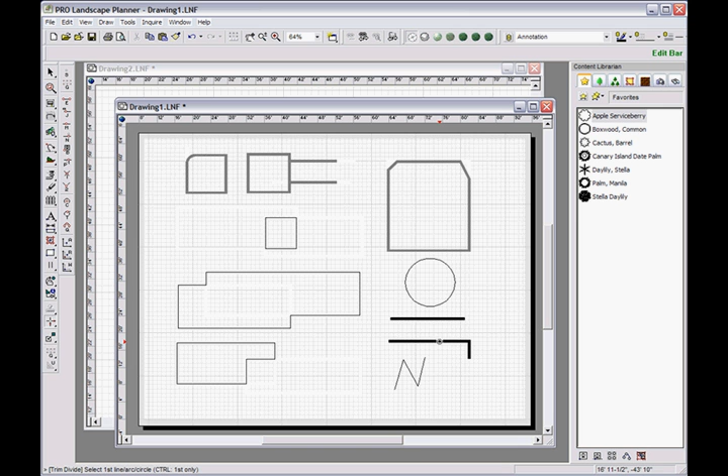Alright, so now the next tool on the trim menu is the trim divide. What this is going to do is take a polyline and break it up into two segments. Let me go ahead and click on the first segment and then the second segment. As you can see now, it is two independent lines, which I can move apart like so.

Okay, so the next item on the trim menu is the trim subdivide. Trim subdivide works with both lines and ellipses and circles, so I can break this up into several segments if I'd like to. What I need to do is set how many segments I want up in the edit bar. Let's go ahead and select 6 segments, and we'll press enter to accept the value. And we'll come down to the circle and we'll just click on the circle here like so.

Let me go ahead and click on this line and subdivide it into 6 separate sections like so. Now that may not be apparent at first, but if you go and you click on the circle here, you'll see that it is in 6 equal segments. And if I press the delete key on my keyboard, I can delete those segments out.

Okay, now let me go ahead and double click on this line here, and you'll see that it is in 6 equal segments. If I wanted to delete one of those segments, I could click on the line there in between the vertice points, and then I can select delete on the keyboard to delete that segment out, like so.

Okay, the next trim tool is the trim join tool. Now you'll notice down here I have some line segments that do meet up, but as I select them individually. If I go over to the trim menu and I select trim join, and then I click on the first line there, and then the second, and then the third, and then I go back to the second to join those two together, you'll notice when I select those, they're now selected as a single polyline.

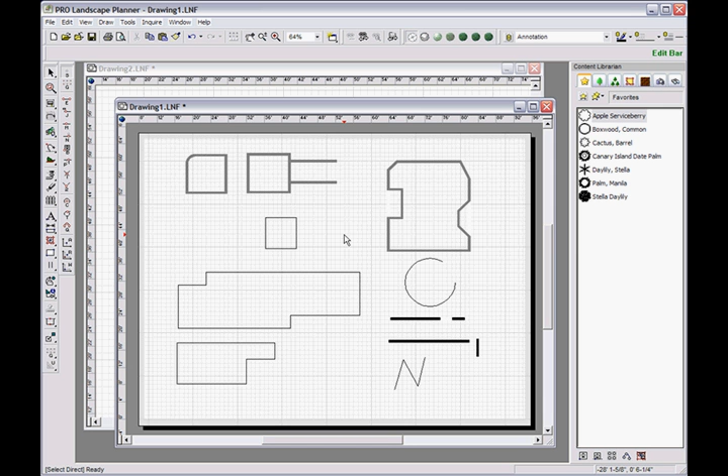Okay, now I've shown you all the basics of the trim tools. Let's go ahead and do a little example here of what we can do with those trim tools. I've created a couple rectangles here, and this lower rectangle has a hatch pattern applied to it, and the top rectangle does not. So let's go ahead and merge the two together.

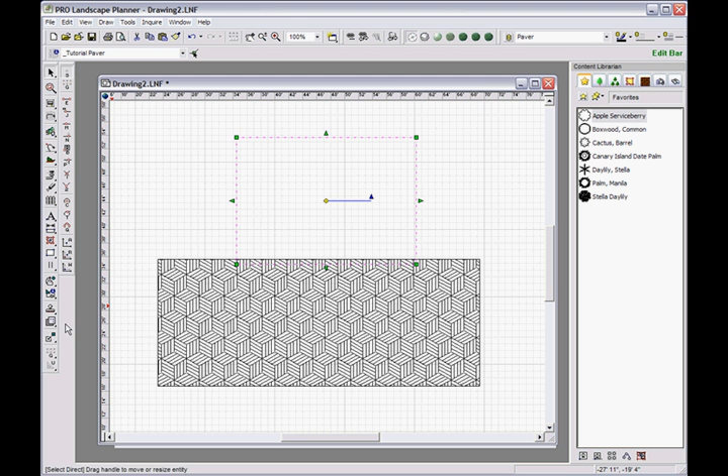I want to drag the first one over the second one there, and we'll use our trim union tool here. And when I click on the first one and then I click on the second one, the first rectangle will inherit this hatch pattern from the secondary area. So let's go ahead and click on the first one, and then we'll select the second. Now you can see that that's merged into one unit.

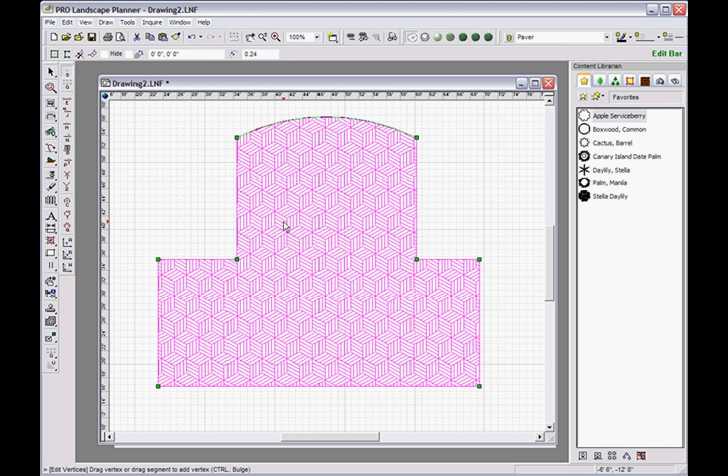Okay, another trick that we can do here is to double click on the outer line here to get into the edit vertice mode, and we can hold down on the control key, and let's go ahead and arc this line up like so. Okay, there we go, and as you can see the hatch pattern followed that arc.

Okay, now let's go ahead and knock a little chunk out of the corner here, and to do so let's go ahead and just draw a rectangle around that corner like so. Okay, and we'll go to our trim menu and we'll select the trim difference tool. I want to deduct this area out, so I need to select the secondary rectangle here, and then the primary area, I'll click on it here, and it deletes out that intersection point.

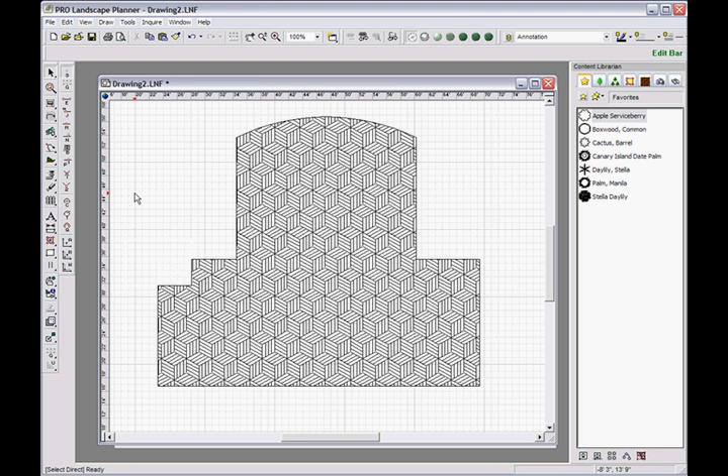Okay, now occasionally what you'll want to do is to mix line types when doing pavers and other objects. So primarily this is straight polylines, and what I want to do is to create a curved area across the bottom here. To do so, let's go up to our paver path tool and select it there.

Now let me go ahead and click, and we'll create just a little bit of a curve on the bottom, and then we'll do a right click to set it down. Now let's go to our trim tools, and we're going to trim difference again. So I click on the area that I want to deduct here, and then I go to the primary paver area up here that I want to keep and click here. Now as you can see, I've got a straight polyline area with a curved bottom here. That's very helpful.